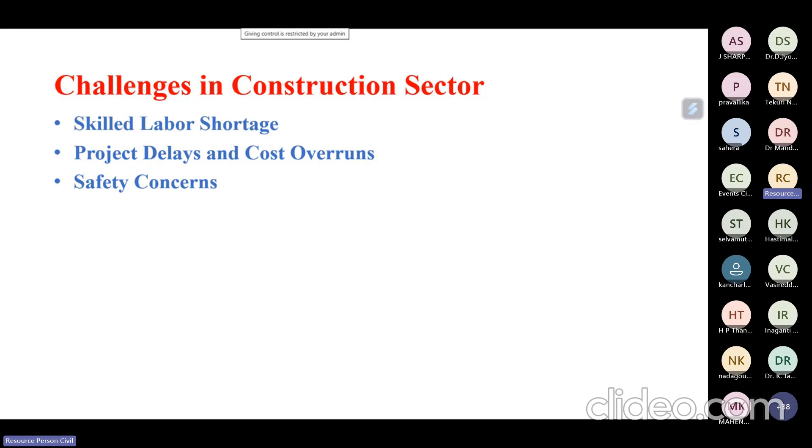Protection, planning protection equipments and all. Okay, so that is one of the things.

Then sustainability and environmental impact. The government is also concentrating on reducing carbon emissions on site, reducing energy use during execution of the project, and using more renewable energy. A lot of environmental impacts are caused due to procurement of materials. A lot of waste is also generated in the construction site, and you have to manage the waste during execution. Material shortage is also there in construction sites.

Okay, then quality. I think if you go for most of the projects, we have very less time to work on a project. Schedules are very compressed, and we are not able to reach the goal set by top management in maintaining quality and progress of the work.

Regulatory and compliance issues are becoming high because the designs are not done in a way that's able to execute the projects, and plan approvals are also one of the issues. Most government projects don't have proper regulation processes maintained before the project starts, meaning plan approvals are not done beforehand due to issues like land acquisition, setbacks, and other things.

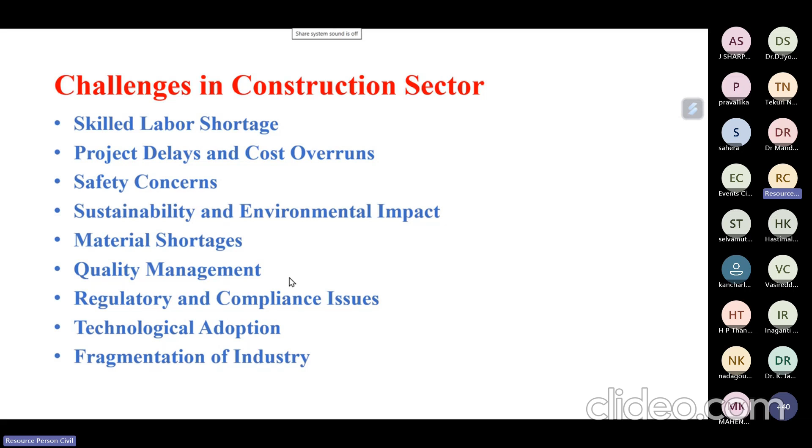So I think, hope you have seen the image of the drone before. This is the Phantom 4 RTK drone actually, and it supports PPK also. I'll discuss what is RTK drones, what is PPK drones.

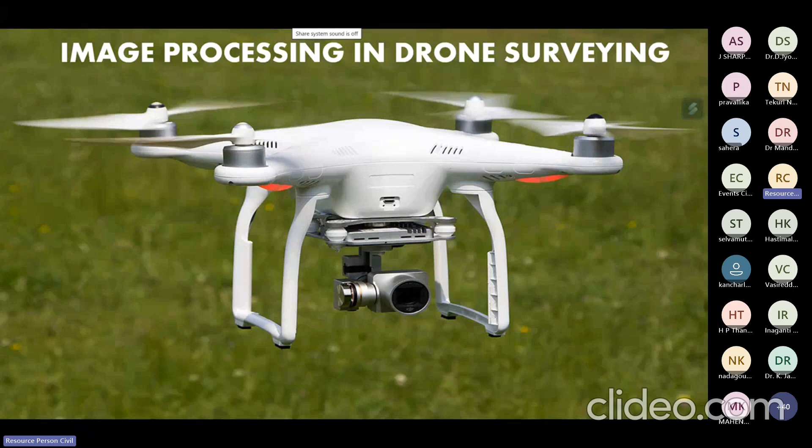Okay, so before I go with the presentation, I'll play one video. Why the need to learn about drones?

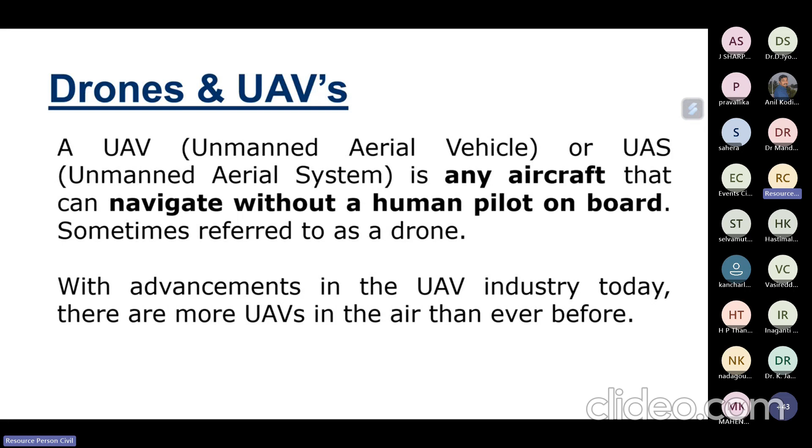So coming to the parts of a drone: it has a GPS integrated into the system, propellers used to fly the drone, and a motor inserted to take the drone to different elevations. Then it has front lights, a gimbal, and a camera, where the camera is fixed to the gimbal so it can be rotated based on the requirement of capturing pictures or video.

It also has forward and backward movement, and an intelligent flight battery, which determines how much time we can fly the drone. It has a status indicator showing at what position it is starting and where it has to come back to. It also has a built-in infrared sensor, since a drone consists of a number of sensors.

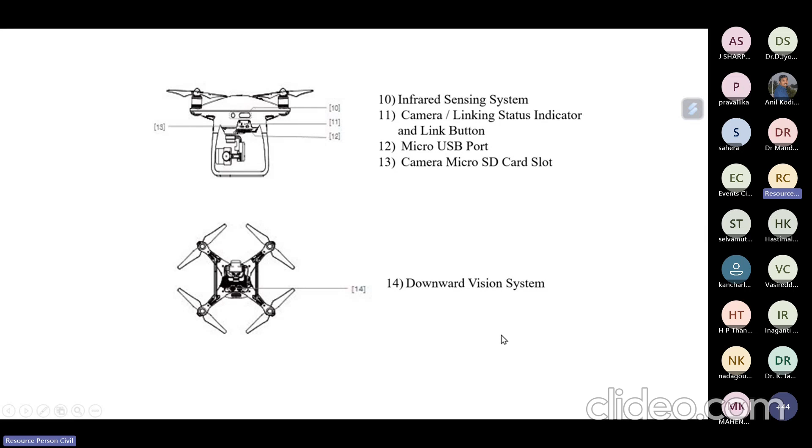Each sensor has a different kind of output in the use of the drone. It has a camera linked to the indicators and the link button, and a USB port to extract data after the post-processing of the flight. This camera chip is also used, and it has a downward vision system to help it come back to its original position.

What is the present scenario in the construction industry? If you go to AP, especially Visakhapatnam, a lot of big projects are coming up. We are getting the first international airport in the state of Andhra Pradesh. They are using drones because it's a big scale project with very long durations and a lot of uncertainties faced during operation. In recent times, a lot of research nationally and internationally has gone into automation of construction.

Automation includes things like BIM and 3D printing. They are using robots also in construction for some operations. These are kinds of automation where research work is being done, but practically, it is slowly picking up its market in the field.

If you take unmanned aerial vehicles, these are used in construction for land surveying, crack detection, construction logistic management, asset management, highway asset management, and site inspections. All these things can be done using drones.

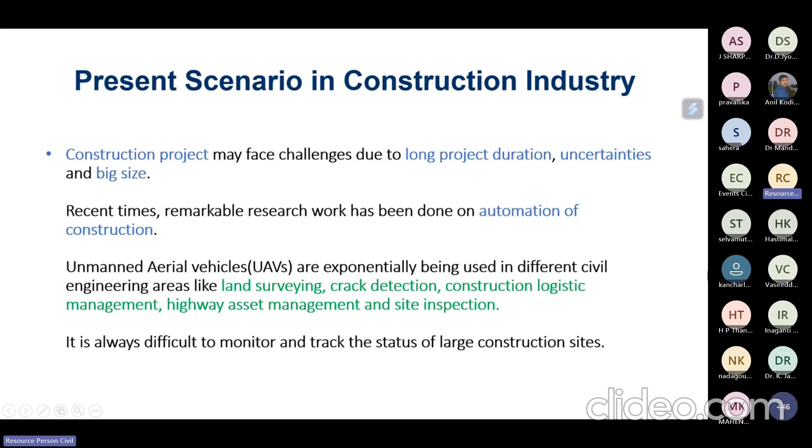Unmanned aerial vehicles collect a huge amount of data from construction projects, which can be processed using different systems. If you take UAV mapping, once it is started, first we have to fix the flight path.

Then we capture images based on the flight path, then do image analysis in the post-processing stage, and finally it is completed. This is the process followed in drone monitoring for larger construction projects.

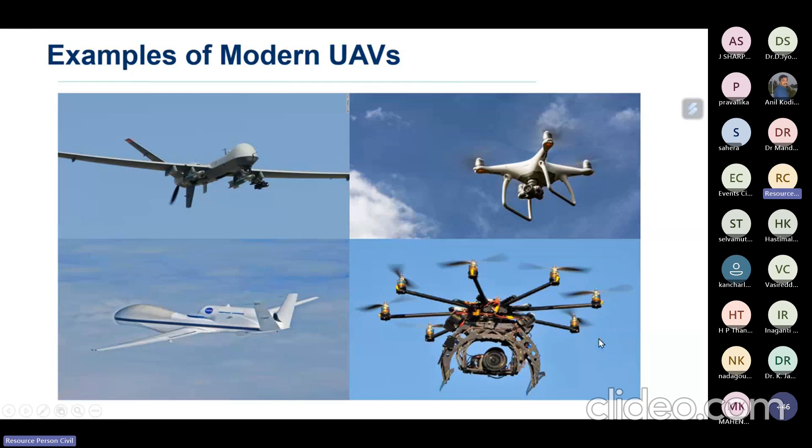All of these do not contain any kind of human pilot - they are all UAVs only. In the video, they are talking about what is RTK and what is PPK.

RTK is nothing but real-time kinematic, and PPK is post-processed kinematic. Real-time kinematic is a satellite navigation technique that improves the accuracy of GPS data in real time. This drone has an inbuilt GPS sensor which is fixed, so it tries to improve the accuracy.

In the video they mentioned 3 centimeters accuracy when flying a drone, meaning from the reference point, whether it's distance, height, length or area - we can get that much accuracy using a drone, compared to a manual measurement.

In the post-processing phase, these drones record raw satellite data during the flight, and it has corrections applied during data processing. Mostly these PPK drones are used to correct the images in the post-processing stage rather than before.

If you want to change the flight path, it cannot be changed, because this model is inbuilt with a lot of satellite corrections during post processing. If you go to ground based stations and RTK, it can be corrected based on the flying only.

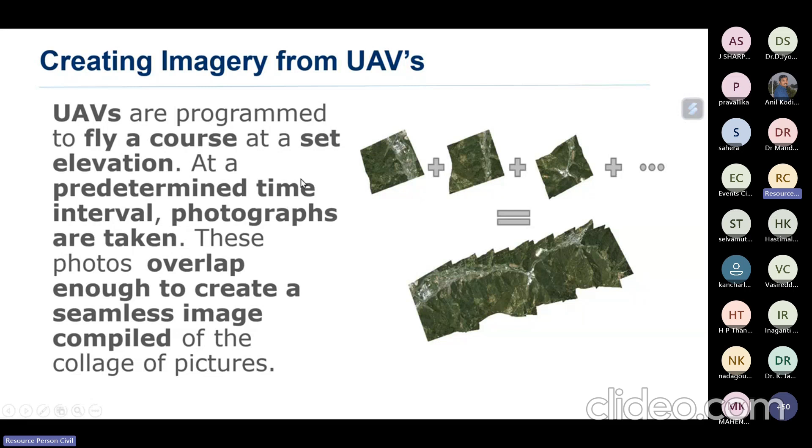Small pictures are captured, and they will be used in a post-processing stage. We'll talk about what post processing is also. I think in the video you have seen something called GCP. So what is the use of incorporating a GCP?

If you go for manual surveys, you have to establish some kind of RLs, reduced levels, for manual surveying. But when you go for drones, you have to establish GCPs, ground control points. Why we establish ground control points is to get very good accuracy, and also to navigate what is the latitude and longitude at each and every GCP.

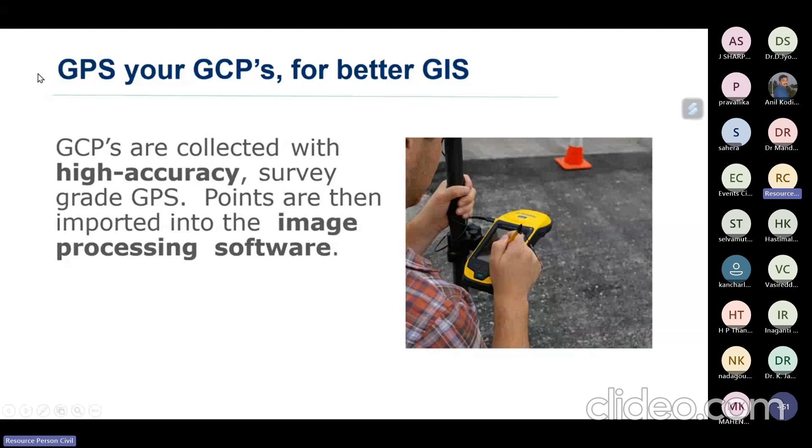If you want to survey the total land, we have to establish a boundary to fly the drone by using GCPs. GPS is also used with higher accuracy, where the image can be processed in a post-processing stage. And how these GCPs are used -

If you take control points, all the control points, we will fly the drone and image capturing can be done. The drone will capture thousands and hundreds of photos at one point, but only some of those photos can be used to map the total data and make it as a 3D model. It will try to sense which location, which image needs to be taken, and which is used for the post processing.

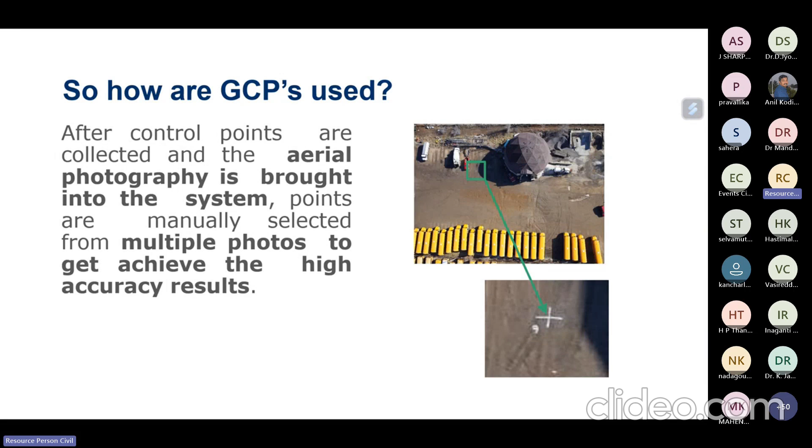It will try to interpolate. How this data can be used is, it will collect manually the total kind of data, and from that we can determine the height and the volume we can measure easily by using a drone with proper accuracy.

So coming to these, these are done before the post processing. Now coming to what is the 3Ws and 2H - why post processing is required, what is post processing, how is this post processing done, what kind of images are developed during the post processing, and how to interpolate all this kind of data taken at the flying time.

Coming to the post processing - before UAVs are used for the analysis, we need to think about what is photogrammetry. Photogrammetrically processed and translated to an accuracy of 2D and 3D orthomosaics, surface models, and other kind of GIS models. This photogrammetry is, when we capture images in flying mode, we always try to move the drone at different elevations.

When you take a picture with zoom in and zoom out, the size is different, and the ratio of angle also will be different. When you zoom, the images may get clarity, but I was talking about manual operations using a cell phone. If you capture an image and zoom it, the picture will be a little bit more clearly visible. But if you zoom out, the picture will be a little bit compressed, meaning the visibility will not be there.

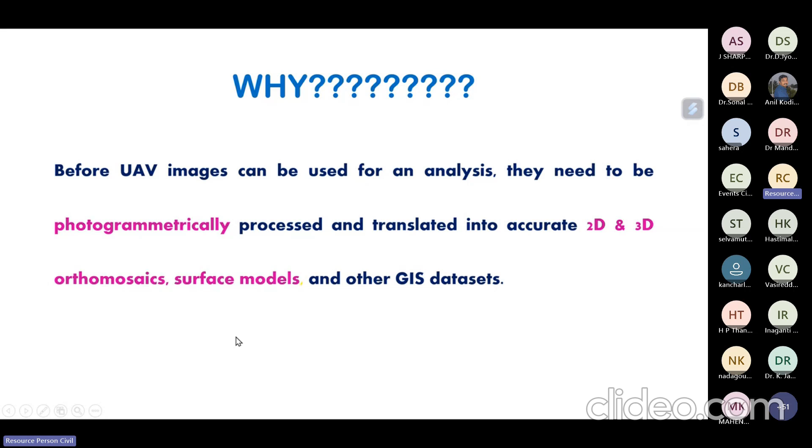You can create surface models for drones, and other GIS data also can be integrated with drones. If you take a 3D model, and want to capture an old structure using all kinds of images, we can build it easily using BIM - Building Information Modeling. We are using an application called Scan to BIM.

For an existing structure also we can make a 3D elevation and a 3D view, and accurately measure the height, length, and width of each and every segment.

Coming to ortho photo, ortho photography, and ortho image - all these are relatively the same, and all these kinds of photographs are geometrically corrected at different scales. When we take any kind of image, every image will have some scale, like 1:100 or 1:200, 1:10, and so on.

When you want to change 1:10 to 1:100, it is very difficult for a manual operation. But if you go for drone capturing of pictures, it will try to overlap everything and form an image which does not have any kind of distortions.

If you take a map also, it will have a proper scale. If you take different locations at different sizes and different scales, it will try to relate all these things and give a 3D location, 3D map, and so on.

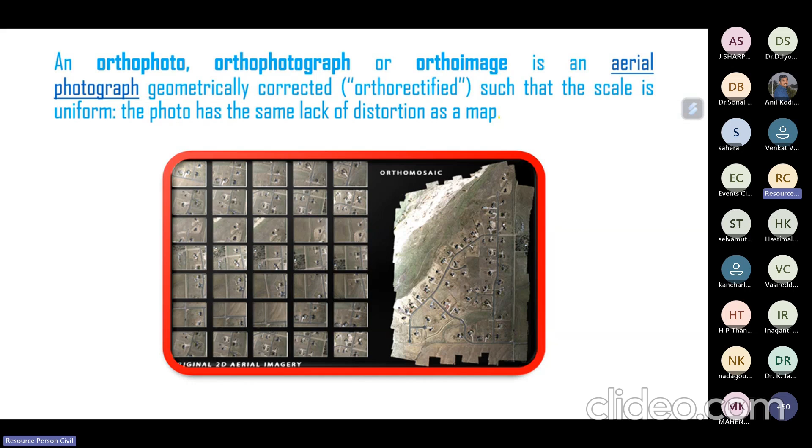So what is this post processing? When you see with your naked eye, at a certain distance only you can see the image. After a certain distance, you cannot see the image clearly.

A drone is also having some kind of lens where it all depends upon the climate, the distance, and the visibility. A drone captures a large resolution image, because the image should be very clear to post-process or to get the kind of output we require.

These images are in such a way that they have proper ground visibility, and multiple photos can be taken with different points noted at different things.

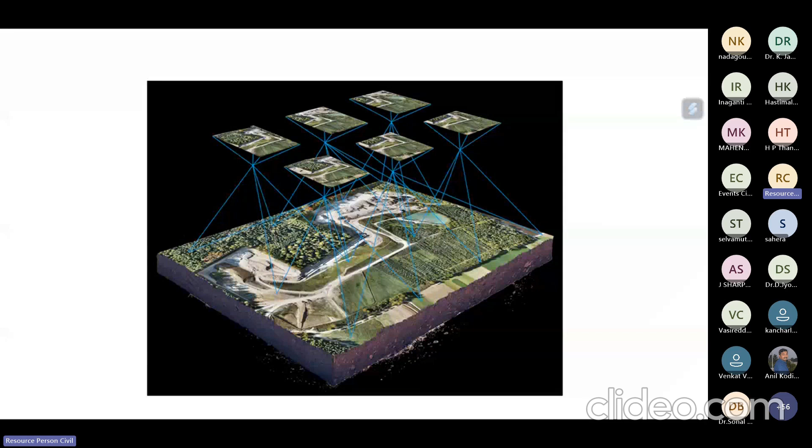This is the kind of thing showing how the images are taken - how we are running the drone and how it is capturing the images, how we are generating a surface model as well as a 3D model.

What are the types of post processing? One is cloud-based automated processing. In the video, what you have observed is nothing but cloud-based - once we take the photos, we'll try to upload them in our drone software like Pix4D or DroneDeploy software, and it will automatically try to process the data.

Then there's local self-processing, which does not require any kind of internet source. By taking the images, we'll try to process them without using any kind of drone softwares.

Expert processing is very accurate and can be used for most kinds of projects with higher accuracy. The stages in post-processing are accuracy, reliability, simplicity, flexibility, turnover time, and cost. If you take cloud-based in terms of accuracy, it is very less, because the software itself will try to do all the things once you upload the images.

When you come to local and self-processing, it is very high because we try to integrate the images taken, which have compatibility, and which will have a collage of all the photos to form a big 3D map. Expert processing is also very high.

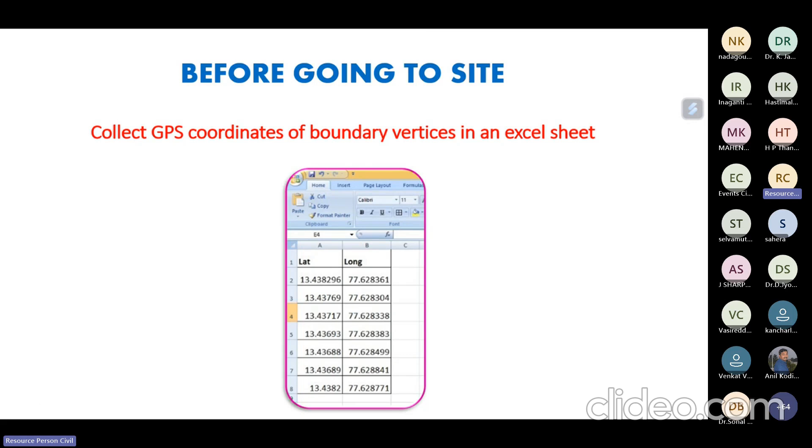The total GPS coordinates can be collected, like latitude and longitude with a specific boundary, in an Excel sheet. We input all this data into the drone remote, so that the drone's flight path is decided based on the boundary that needs to be surveyed.

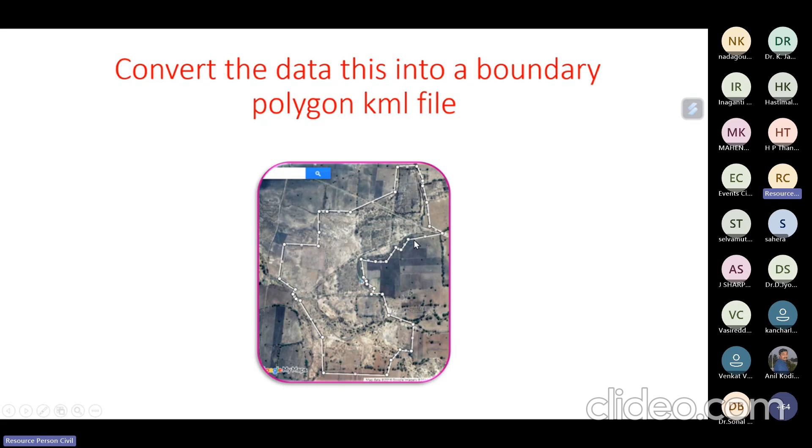We want the height, the reference level, the contour, the area, and the latitude and longitude at different levels - all these things we require. So we can convert all this data at different points and fly a drone to capture the image, preparing the flight path as I've told you previously.

If anything is missed out, post-processing will not work and it will not give any kind of image. So you have to be very careful during the flying of the drone and fixing the flight path.

So the workflow is based upon the area - we have to decide how many points should be there and the strategy of developing a model. We prepare the points where the drone has to fly, because we have to mark the proper reference level at the intervals we are taking to get the final output.

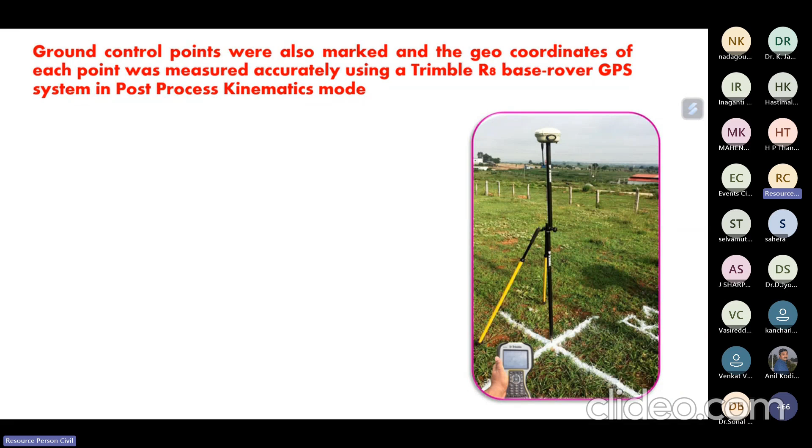This is an instrument, a sensor, developed by Trimble, and it will give the geo-coordinates of each and every location. This kind of equipment is also used in post-processing to make more corrections on site.

And if you take the flight path after flying the drone, you've seen a lot of images are taken. Some images are used for processing, while some images are missing clarity.

This kind of images cannot be used for making a 3D model. Even though we have taken a lot of images, some images are only used for post processing. During the movement of the drone, images cannot be captured very fast, or if you really want to capture any kind of images, the drone should be stable at one position to capture the image. In movement, it will not capture the image with proper clarity.

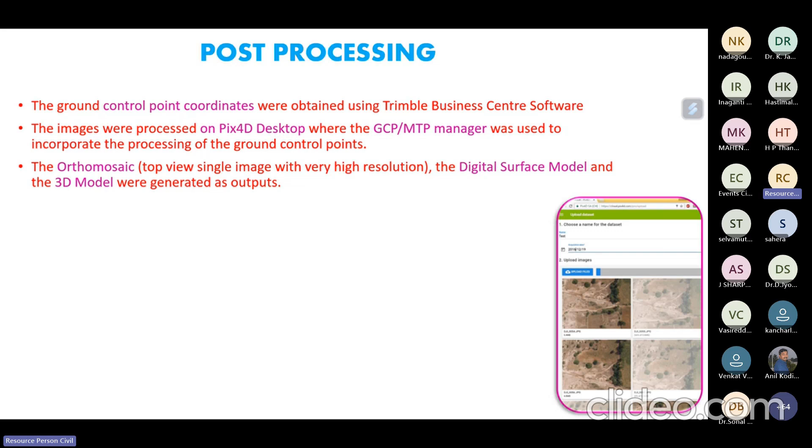If you take ground control coordinates, in post processing that is done by Trimble software, all the corrections can be made. For post processing, the software used is nothing but Pix4D, and it will try to integrate all the images and make a model. We can make a digital surface model, 3D models, whenever required.

After the image, if you really want editing of the image in post processing, we can easily edit and make changes for the existing reference points in post processing.

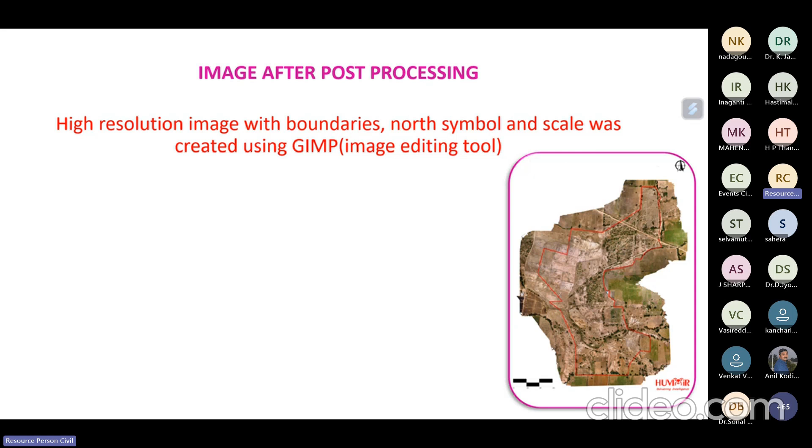What is the advantage of using these drones? In most cases, it is nothing but time saving, and it's used in inspections. We can get all these things within lesser time, and cost reduction also can be there, because of manpower. If you go for manual survey, we require a lot of manpower to make area calculations or volume calculations. By using drones, extensive manpower reduction will be there. Equipment cost also can be significantly reduced, and it enhances proper safety.

If you want to go to different locations and work with drones, it is easy, but a human cannot go. If you go to a forest, rivers, or dams, it is very difficult to do the survey. So by using drones, higher accuracy can be maintained.

This is because of sensors like LiDAR, light detection and ranging. This is used for higher accuracy. To get an image with higher accuracy, LiDAR is used. RTK GPS drones are having very high centimeter precision in capturing the data.

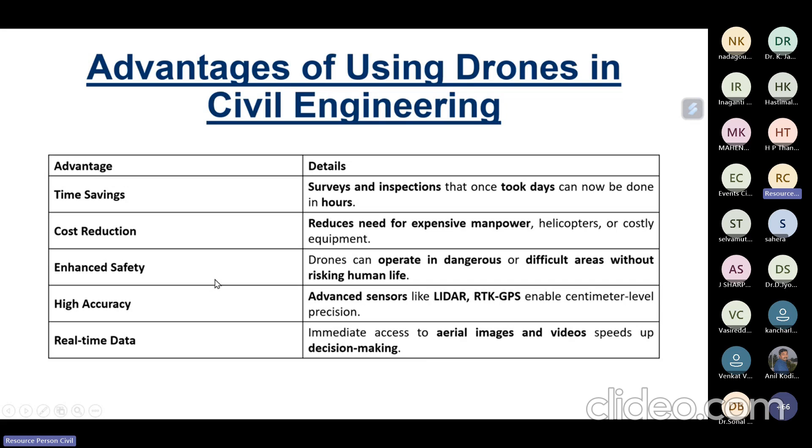Real-time monitoring and real-time decisions can be taken by using these aerial images and videos, by different people in construction, to decide what has to be done in the next planning or controlling phase. So these are some of the applications.

Very soon, I think governments want to use these UAVs for municipalities also, to check whether lands are constructed as per the plan approval given, and what they have actually constructed. E-governance can be made very easy.

If you want to make a tax payment or pay a fine, manually going and inspecting is not required. By using this drone, we can get higher accuracy, because manually calculating, some mistakes may happen. But if you go for a drone, the accuracy is high. It is easy to monitor, and the documentation also becomes very easy.

The AP government, if they are giving any land, they are doing geotagging and all. So it is very easy for top management and government stakeholders to use drones for taxation or revenue purposes, and you can see easily what is mapped versus what is actually constructed.

Drones are also used on railway tracks, because any kind of gaps between the fish plates and anything else can be monitored easily by using a drone, since the capturing of images will be high quality.

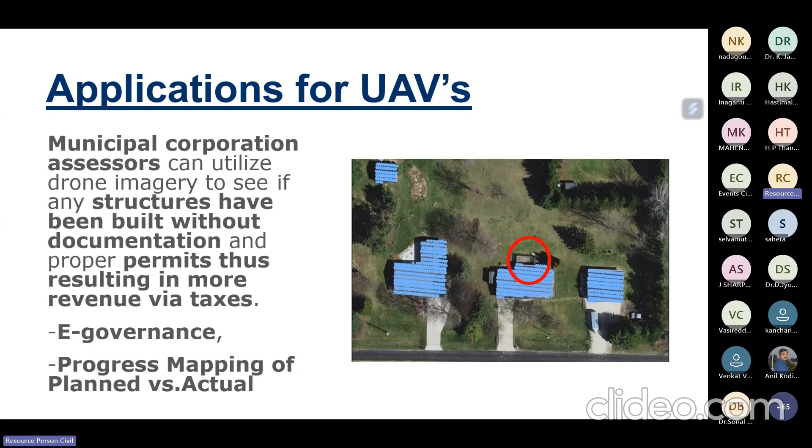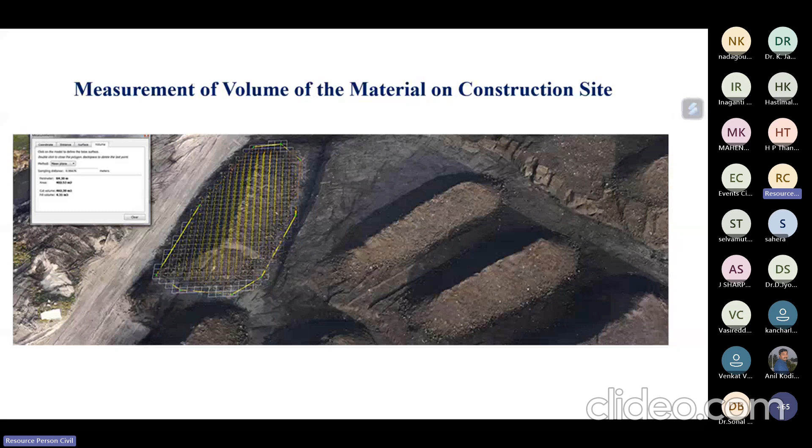Another general application is volume calculations, because a lot of material arrives at the site, but it is impossible to measure the quantity of material dumped onto the site manually. A drone has good accuracy, so we can measure volumes using it.

One more application is that nowadays, in most other countries, they are using drones for disasters also. To predict the disaster, or to predict the post-disaster situation, we can use the drone beforehand.

We'll be getting information from different sources, like satellite data from oceanography and other disaster management institutes. Based on that, we can directly predict the amount of damage easily by using a drone. This is one of the major applications where the Indian government is also driving drone usage in various areas, and drones also have thermal sensors.

We can use different kinds of sensors to know about solar panels and other such structures. The input and output of each and every panel can be measured without going to the site to check manually. We can also make a 3D model and capture the details, getting higher accuracy by using digital imaging and thermal imaging cameras.

Next, drones are used for structural health monitoring, which ensures infrastructure safety and longevity very easily. Bridges and buildings are more critical because after some years proper inspection is required. But manual inspections take higher cost and higher risk, and safety is a major concern when testing structural strength and knowing the residual life of a building or bridge.

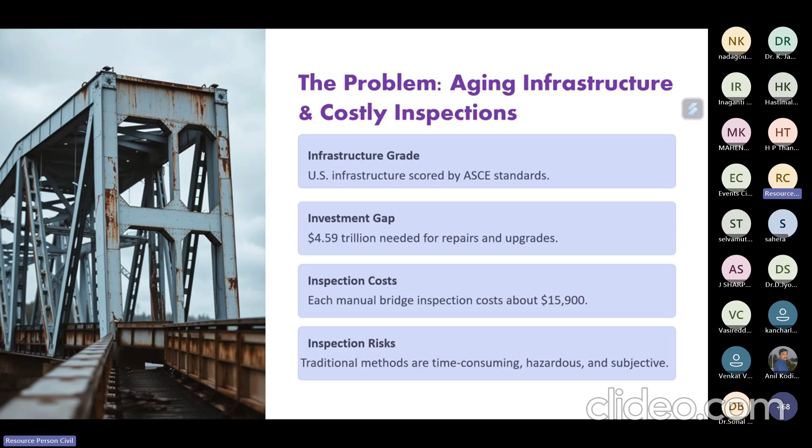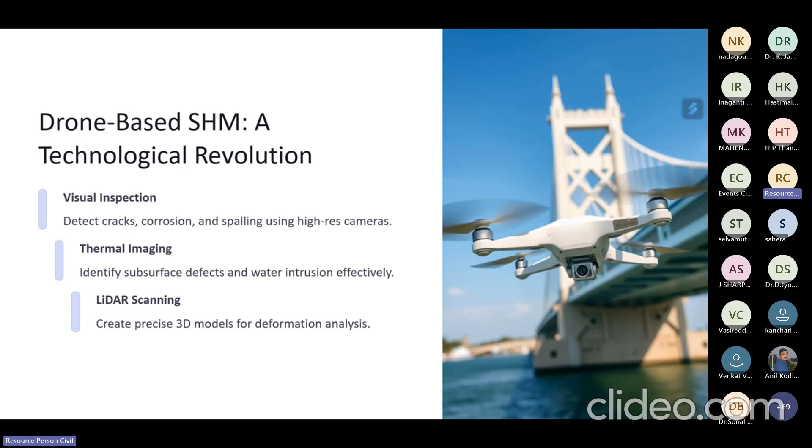LiDAR is also used for scanning to create a 3D model. As we've seen previously with drones, we can create a building model of an existing structure using this method.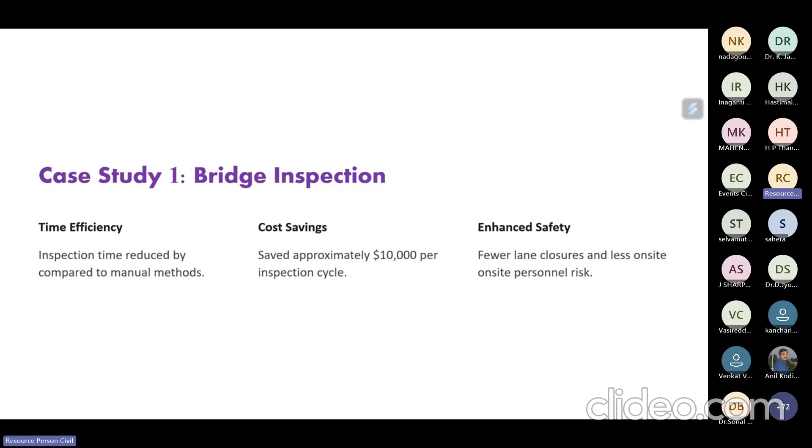This is a case study done in the US. Manual operations are time consuming, whereas drone operations can be done in much lesser time, and costs can be saved up to $10,000 per inspection cycle. Safety is also maintained since you don't require any scaffolding equipment. To test building height at different levels, you normally need scaffolding pipes to climb and test the strength, but a drone doesn't require any of that, which keeps the people testing the equipment safer.

So overall, around 75% of cost can be saved, with significant safety improvements made by using drones, and turnaround time is also saved by using these drones.

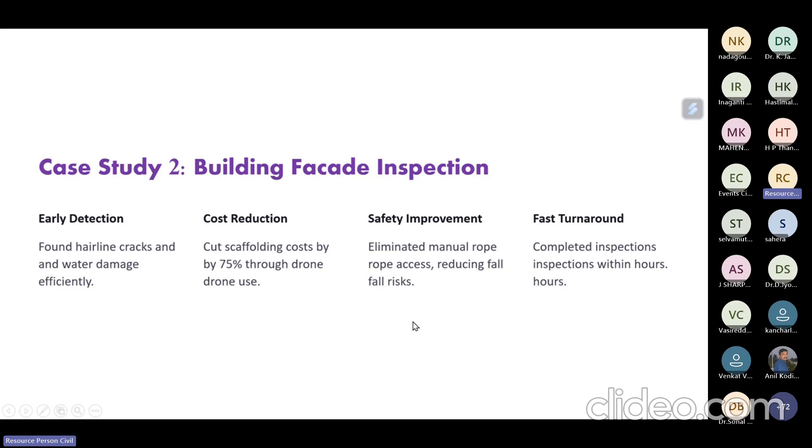I'll play one video. I think this is a structural inspection done at NTPC Vizag, on a chimney.

Okay, so I'll play this. This is a post-processing phase where we used a PPK drone. We have used Phantom 4 RTK, but it is in the post-processing because it supports RTK as well as PPK.

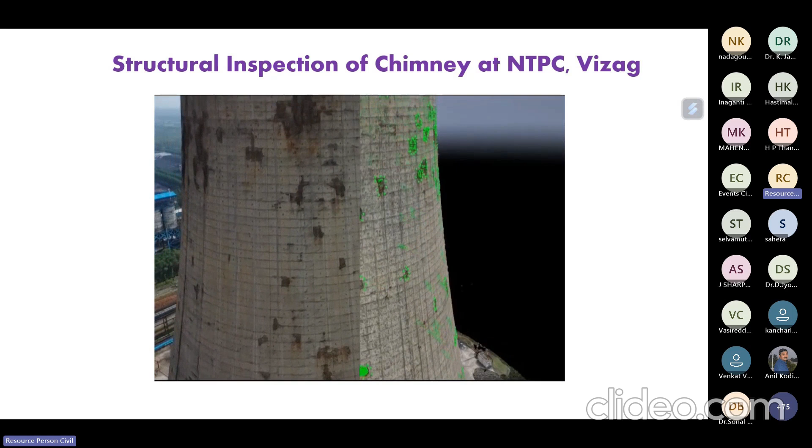Have you seen some kind of portions you are getting in a green color? Okay, those portions are nothing but the cracks. Those are inspected, and we can do the volume calculations. What is the stage of the crack? How much corrosion attack is there on the crack? Also, we can use a drone to check this actually.

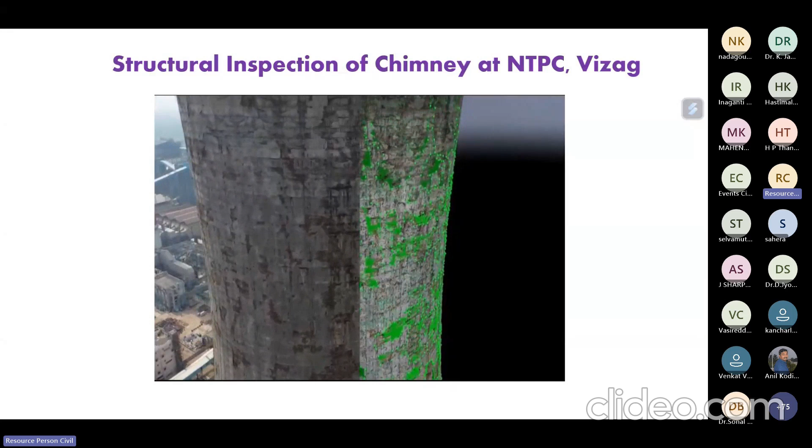Okay, so this is playing a very important role in the future. I think you can predict the future status of the structure also by using a drone, tentatively. So residual life also you can measure by using a drone. This is also one of the things, in most of the constructions they are using this structural health monitoring also.

Okay, and engineering inspections are also can be made. I think this is a kind of structure, a viaduct with two kinds of spans, and it has a highway bridge of 521 meters length. It is in Italy, where we captured from the top using a top surface drone where we are running. 1398 aerial images have been captured by using a drone to make a 3D model. And if you go below the deck, we have captured around 1932 images to make an inspection.

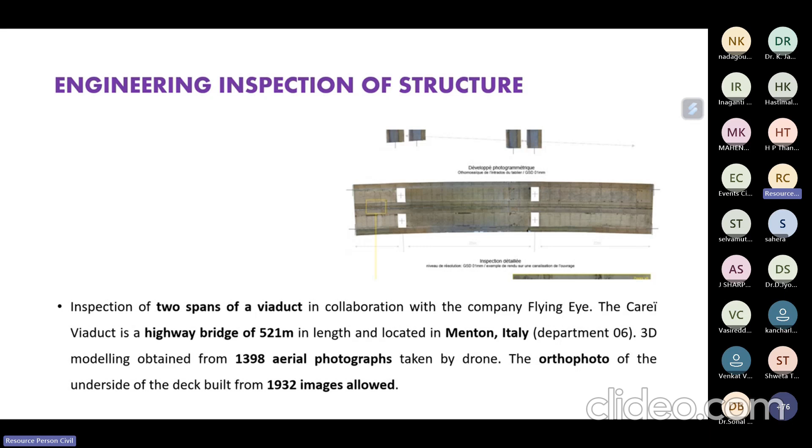This is not done by us. I have taken some case studies and I'm presenting to you. Like if you can make a BIM model, maybe if you want to do structural changes or modifications of any structure during some time, what is the damage that is done from the construction stage to after 50, 30 years, what is the damage and life. Also, we can predict by using this BIM model.

Okay, so this is a kind of model. This is an existing structure. I think we have captured the total images by using a drone and made a 3D model.

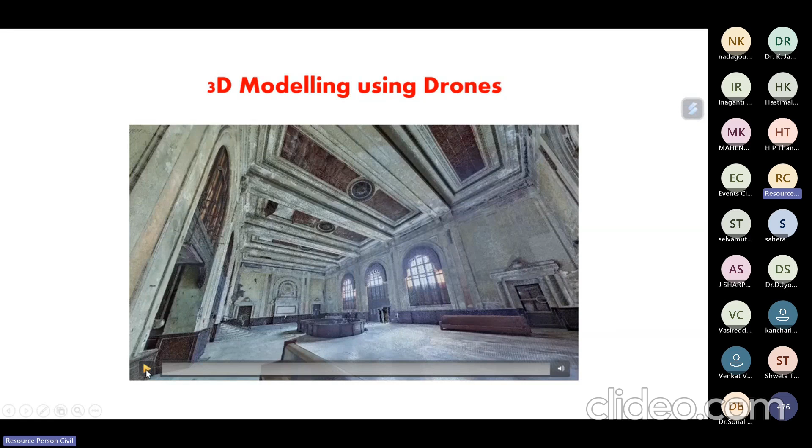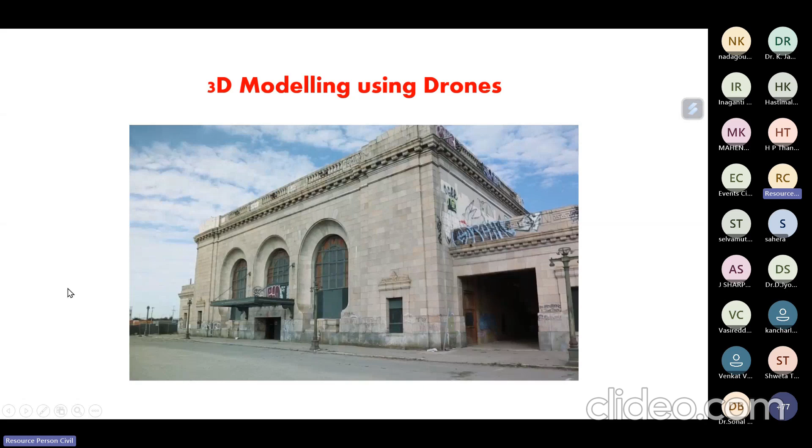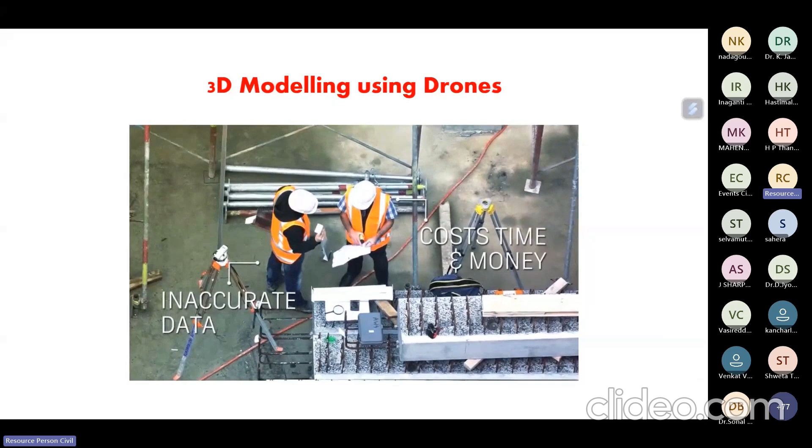For any design or renovation project, you need to capture existing conditions. But traditional methods of surveying are painful, time-consuming, and tedious. Multiple trips to the job site and manual capture methods can lead to schedules overrunning and base information that's often incomplete or inaccurate. And inaccurate data costs time and money.

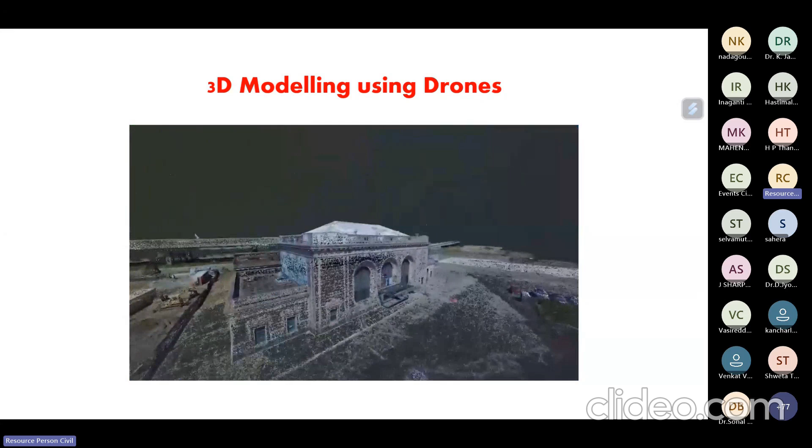Fortunately, reality capture is changing the way we survey. It's a process that captures, measures, and maps millions of surface points to build a textured, high-resolution, precise 3D model of your site. You'll be able to scan quickly and accurately, making it easier to survey, plan, renovate, and construct new buildings or infrastructure. You can scan sites faster and easier than ever before using reality capture.

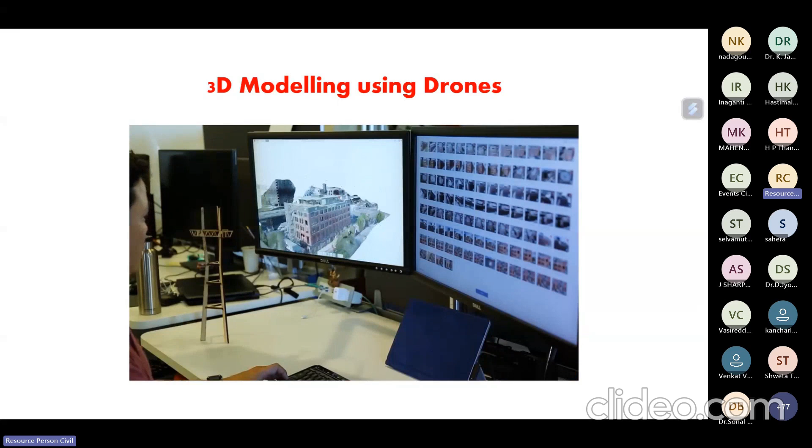With ReCap Pro, we've simplified the steps so anyone can use it, whether you're a beginner or a specialist. Kickstart your project with reality capture in 3 steps. First, gather detailed data using LiDAR or photogrammetry technology. A camera mounted to a drone or a laser scanner can scan the site in hours, not days. Some laser scanners are now small and light enough to carry in a backpack, and they continue to reduce in cost.

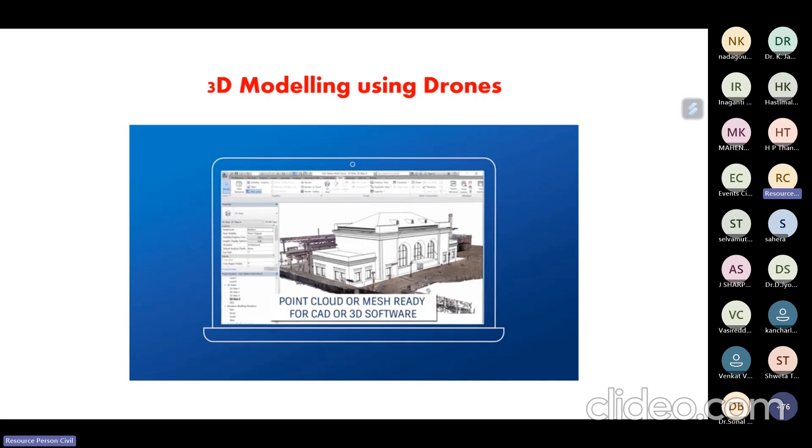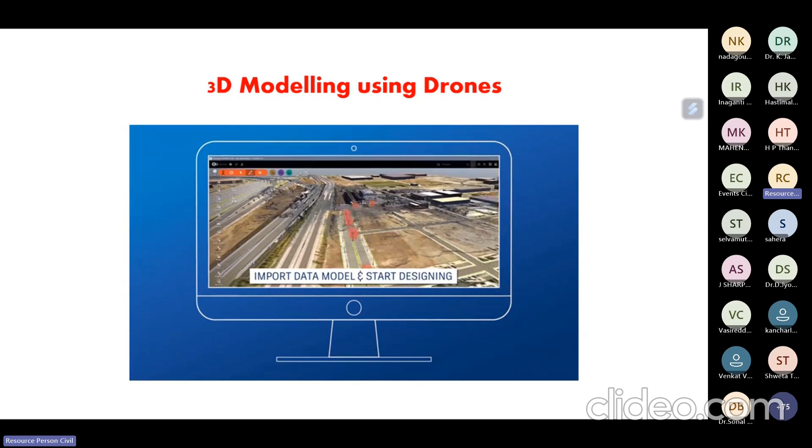Next, ReCap Pro automatically registers, cleans up, and analyzes the data. The end result is a point cloud, or mesh, that is ready to use with CAD and 3D modeling software. Finally, once you've imported the data, you're ready to start designing, working with information that's up to date and accurately represents real-world site conditions. Reality capture is a simple, time-saving method for capturing and converting site information into accurate 3D models. Design and build with confidence.

Hope I think this kind of video have given you the picture. So existing structures also we can make a 3D model. We can measure accurately the length, width, and height, everything.

So I think some of the structures they want to modify. So manually taking the measurements and building the model, it will be a very time consuming process. Maybe this is lesser time consuming, with a proper kind of output we can make it as it is, as a physical model.

And one more application is, since our concept is on how the construction monitoring is done and reported using these UAVs, for a bigger kind of project we'll do what is the concept and what is the scope, detailed drawings are made in 2D. And some elevation also will be prepared for the plan approvals, all these things. Then, to get a clear picture of how the physical model will be, we'll be creating a virtual model by using BIM tools.

Okay, then what is a construction sequence? Which kind of part needs to be constructed? How to plan the schedules? How to give specifications for each and every element we are constructing. This is a general traditional process that is followed for most kinds of operations for any project.

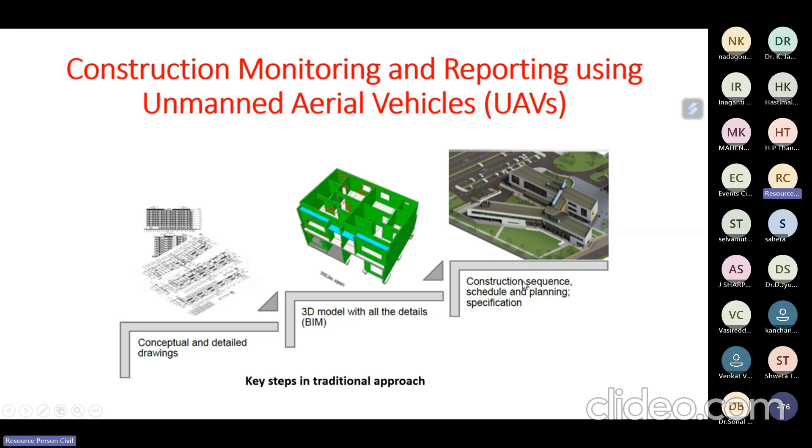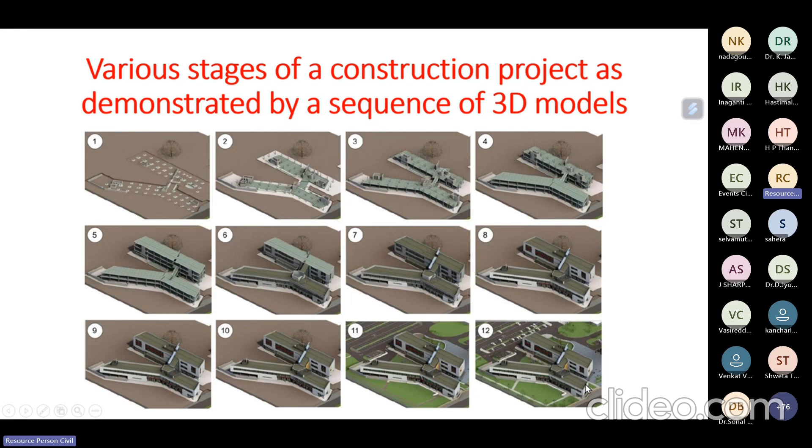Okay, coming to the drones. The various stages of this construction project are demonstrated by 3D. This is the first stage, you have to construct the foundation. Second stage, you have to construct the plinth beam. And third stage, that sequence of operations, we try to capture the images and show people this is the stage how we were able to do the project.

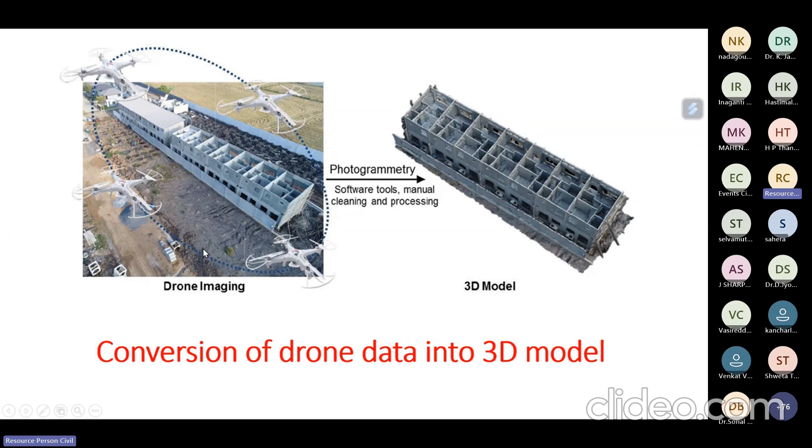But what drones will do is nothing but drone after construction and all. So we'll always try to compare with this existing 3D model we have developed by using a BIM software. When you compare the drone image, this is an existing structure which is built, and this is in a plan stage. By using a photogrammetric tool, we'll try to compare the physical model with a virtual model built in BIM. This kind of model is captured by using a drone, and how to convert the drone data to a 3D model, also we can make by using this easily.

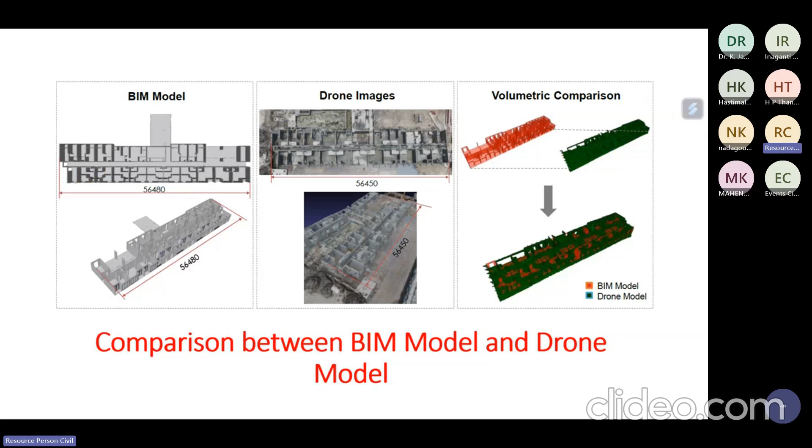Also, we can compare with every schedule. I'll give you one example. This is an isometric view, this is a plan view, this is an elevation. We can compare all these three things by using planned schedule versus on-site progress. That can be done by using drones. Based on that, we can think what stage we are at, whether we are ahead of schedule, behind schedule, over budgeted or under budgeted. Easily we can do a comparison.

Virtually, because with manual things you miss out, some kind of errors will be there in updating the information in your Primavera or MS Project and all. But a virtual comparison will give you a better kind of percentage of things.

One more example, we are comparing between a BIM model window schedule with existing drone images, what is the percentage completed and at what level the window positions are. When you go for an on-site check, a lot of corrections will be there. Maybe at a 3 meter level we have to construct a sill level for a window, for example, but we are constructing at 3.1, 3.2. That kind of error can also be noted down, and we can compare with the existing drone models. So how much percentage of activities are completed, which activity is not completed, we can always compare.

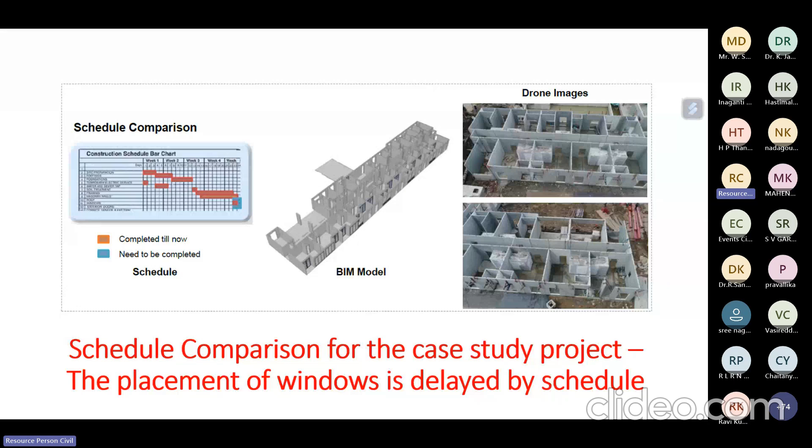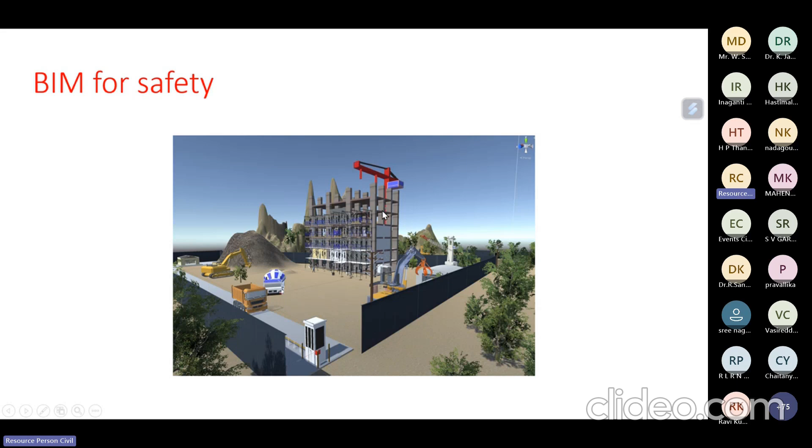When you compare using drones along with sensors, we can monitor, for every person, if they are removing the PPE kit, using these drones. So virtually we have to design everything, then on site we compare everything, and what safety items are missing on site, we can easily identify. Minute things are generally neglected on most sites, but they have a very huge impact on the cost and time of operations.

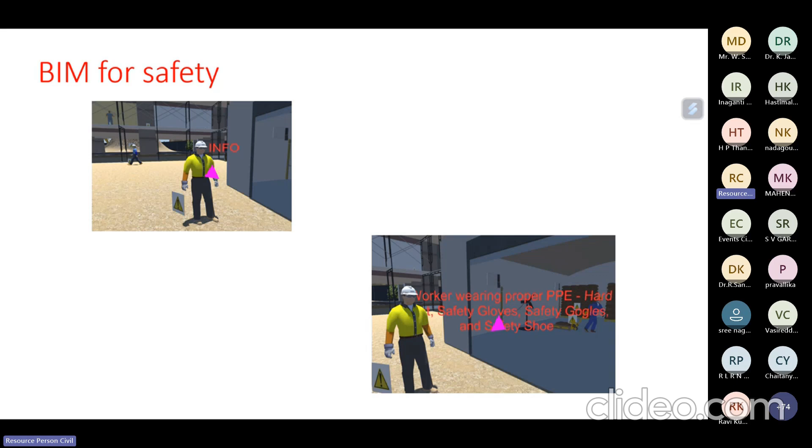AR and VR digital twins can be made using BIM tools. Drones are also used in agriculture. During COVID, most farmers were not able to move into agricultural lands to monitor crop health, so drones can also be used for monitoring the health of a crop.

The major challenges and limitations of using drones are that there is a regulatory body in India, the DGCA - Directorate General of Civil Aviation. They have rules that you can fly the drone up to a height of 120 meters, that is 400 feet, and only in a non-flying zone. In a flying zone, you cannot fly the drone - you have to take permission from civil aviation and local authorities like the police.

In the US, it's the Federal Aviation Administration, which also has certain regulations. In Navy operations and similar areas, drones cannot be flown. Weather conditions are also important - the big challenge is that you cannot fly the drone in rain or wind, as those operations are not preferred because it will damage the drone as well as the sensors and the inbuilt LiDARs in the drone.

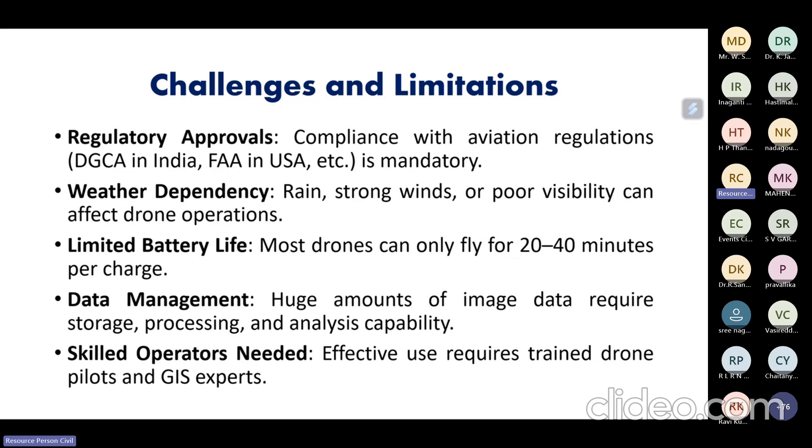The battery life is very less, generally, because it depends on the payload criteria and how much time it has to fly. If you increase the payload of the drone, the operational time decreases, so general drones mostly have a flying time of around 20 to 40 minutes. Data management cannot be done easily because huge amounts of image data can be captured, stored, processed, and analyzed at different intervals of time. A skilled operator is also needed to operate the drone - we have to take the drone license as well as have a pilot who is flying the drone, a drone pilot. So these are some of the challenges and limitations of using drones.

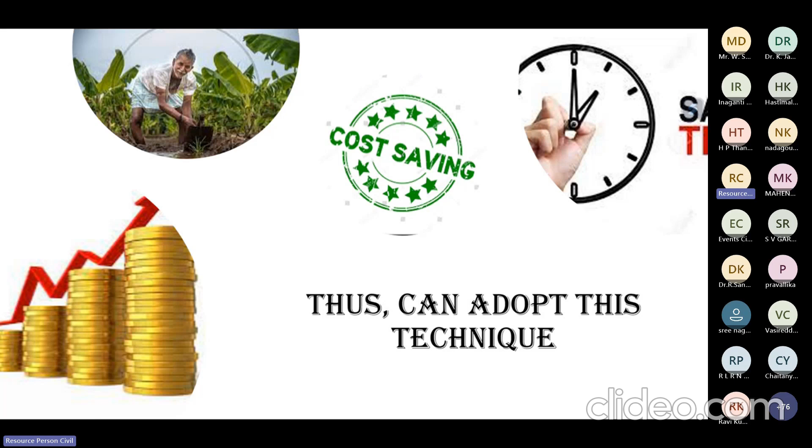Thus, adopting this kind of technique will always be a time saving and cost saving process. That's it - I think I made it very simple and application oriented. So if there are any queries, we can take them up.